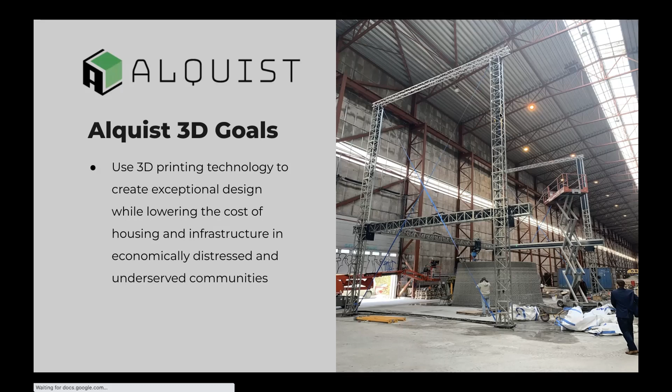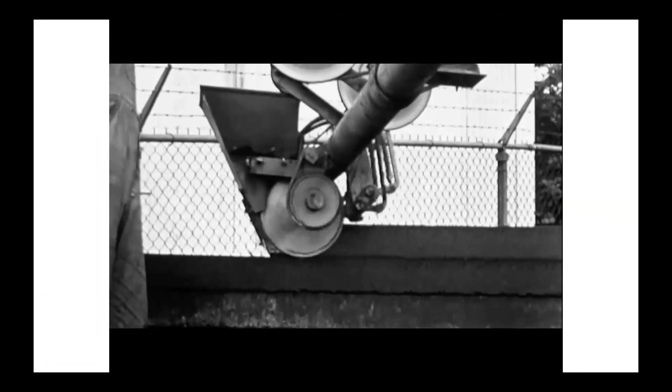Here's what's also interesting behind all of this: 3D printed homes are not necessarily new. This is a video from 1941. This is basically how we do our 3D printing with concrete right now, except that we don't stand on a hopper and direct our scaffold and dump the material directly into the hopper. We have a much more efficient system of doing that. But this is basically how we 3D print a home today.

Here was printed - we started in Virginia. We're based in Iowa City, of course, but we started printing in Virginia because we collaborated with Virginia Tech University and the state of Virginia to print the first home. This one was with Habitat for Humanity in Williamsburg, Virginia. This became the first ever 3D printed home in the world to be owner occupied.

So this is the home. It is a 1,200 square foot, 3-bed, 2-bath, single-story slab on grade home in Williamsburg. All we did was print the exterior walls of the home. The rest of the home is constructed entirely the same as you would build any other home. We still need all the plumbers, electricians, carpenters, roofers, etc. All worked on this home with the exception of the exterior walls.

The inside of the home, the homeowner chose to put up drywall and fur out the walls over the concrete. You don't have to do that, of course, but she chose to. But walking into this home, you would never know that it was 3D printed. So here's a short video of those walls being printed.

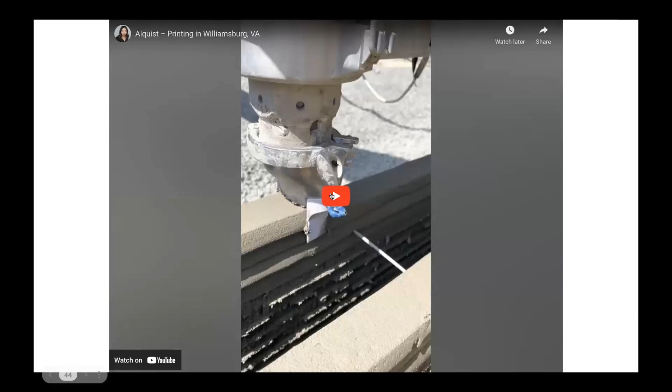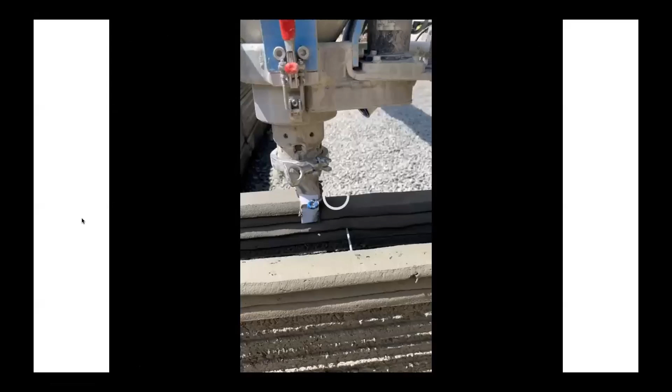Looks like the internet is taking its time here.

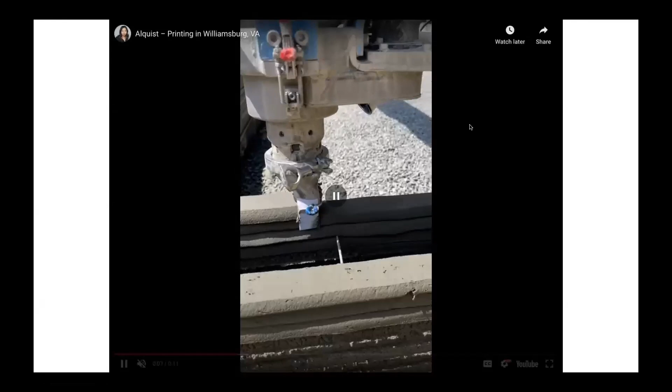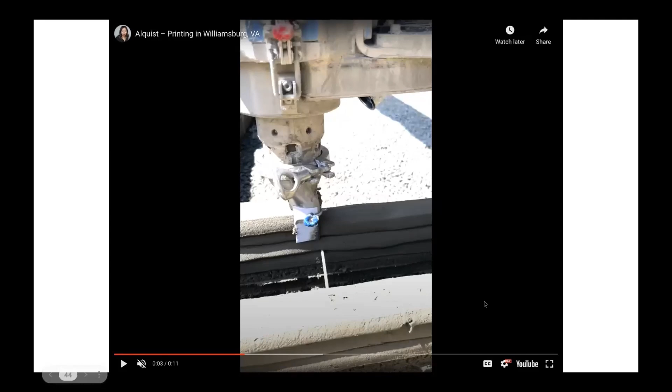This is the machine printing the two sides of the wall. The wall has 2 inches on either side with a 6-inch gap. Inside that gap between the wall systems is where we insulate and put our electrical. I'll show you some images of that in a moment. Sorry, I don't think the video played there, but I have a few others to show you.

According to Habitat, we saved 10 to 15% off what they normally would have spent had they constructed this traditionally. The home is Earthcraft certified. We put Raspberry Pi sensors in all the wall systems, reading whether there's ever any moisture buildup, shifting, or vibrations in the walls. Thankfully, in a little over 2 years now, there's been no issue whatsoever with this home.

Home number 2 was up the road in Richmond. This one was a little bit bigger, and a collaboration with lots of different groups. It's a 1,550 square foot, single story, slab on grade home, 3-bed, 2-bath, very similar design. It was important to us to design these homes so they fit in the neighborhood where they are — that was crucial. We can do futuristic, fun, crazy designs, but we wanted this technology to be adopted early on, and the best way to do that is to make a home look like a home. So that's how we landed on our designs.

This home, we did not smooth out the walls like the other home. This is the look of those walls if we didn't touch them. But I'll show you some other looks to those walls as well.

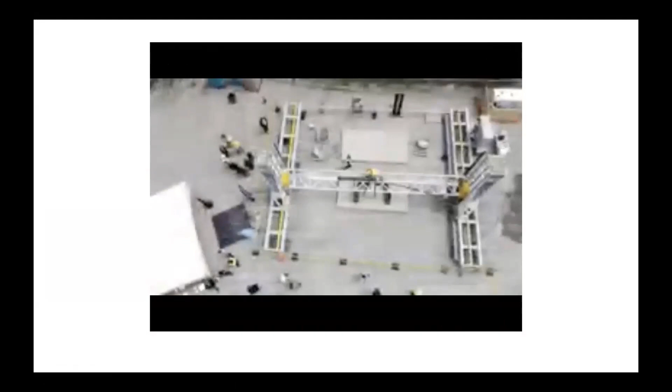For these homes, we used a different printer — a Black Buffalo large scale industrial gantry style printer. This printer is enormous, as you can see, and runs on a track system. It's a great printer, but it costs a lot to move. It takes over a week to set up and calibrate, and doesn't print as quickly as we'd like, so I'm moving away from that. I'll show you where we're going.

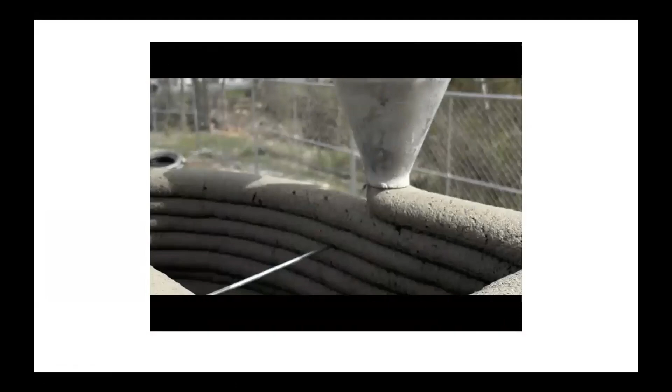That printer helped print these 2 homes here — the first time we did 2 homes side by side, in Newport News.

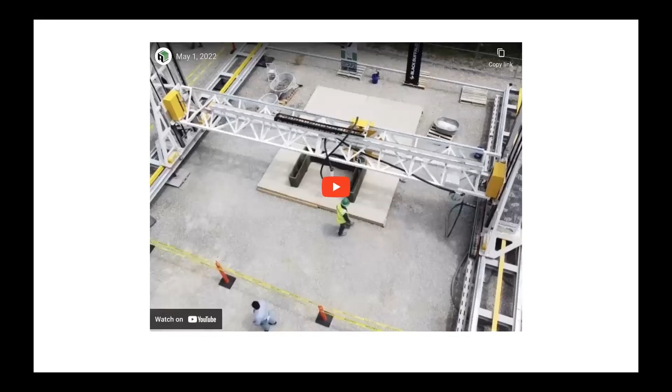See here how we do the wall system. These widths, the walls, are 3 inches wide, with a 6-inch gap. Inside the gap, what you're seeing here is at the 3-foot mark. We stop there when we get to the base of the window systems.

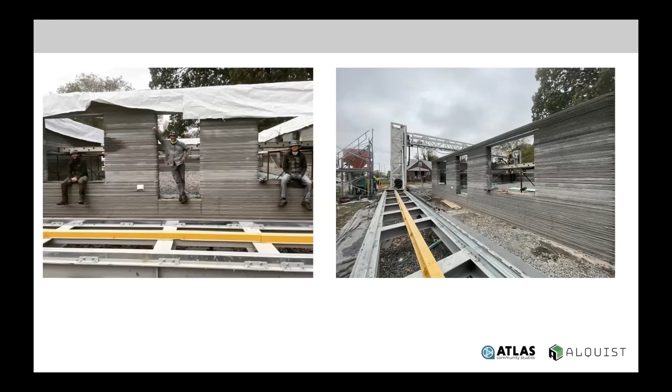That's when the electricians come in and lay the conduit like you see here. We also put reinforced steel ladder systems every 12 inches, and can use rebar if needed. We also put in all-thread that goes directly into the footing and connects into the top of the bond beam at the top of the wall system, so we've got great structural integrity.

Then we grout out these mini columns below the window systems for extra structural stability. After the electricians put their conduit in, we cut out the junction boxes and sockets into the concrete in real time while it's still wet. The electricians finish their job, and then we come back and keep printing straight on up.

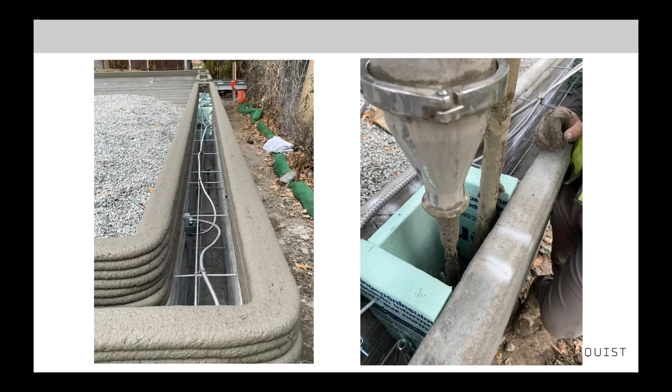Here's a look at the 2 homes when they were finished side by side in Newport News. You can see the plumbing gets put into the center, and then we lay the slab.

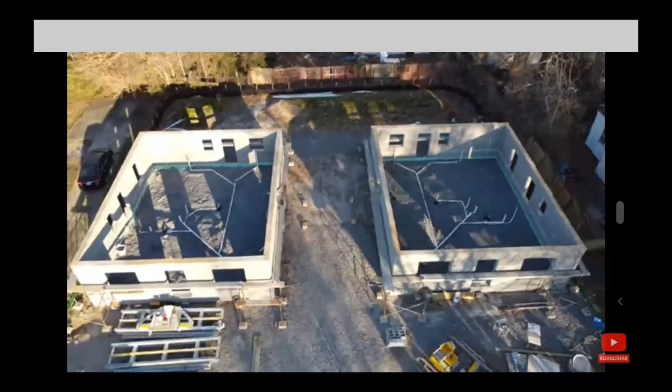Here are the advantages of 3D printing as we know it today. The first three are your capital savings. First, time — we can reduce the overall time to frame out a home by 2 to 4 weeks. Once we get moving, this is a scale game. After we print 1 or 2 homes on a job site and move on to printing 5 to 10 more, we can go incredibly fast. That is the goal.

So we're moving quickly there. We need less labor on site, only about 2 to 3 humans to run the printer. The material cost is typically less expensive than traditional lumber, and we need to constantly lower that cost. I'll talk about how we're doing that in a moment.

But you add all that up, today, if we're just printing 1 house, the costs are pretty comparable to a regular stick-built home. When we're printing 10 or more homes, we can get to a 5 to 10% savings. When we're printing 25 or more, we're seeing 20% savings or more already right now, and we keep getting better. I'll show you that.

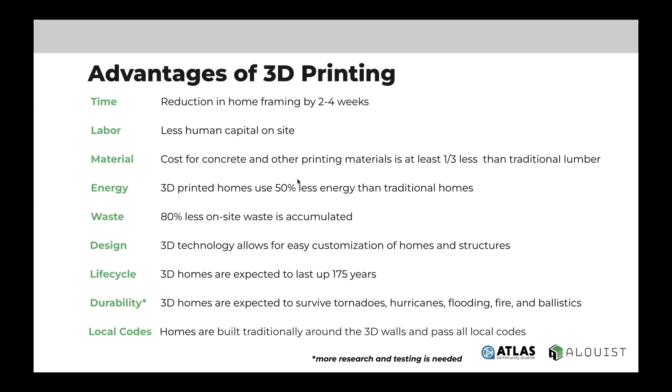The energy, these homes are thermally broken, so we use 50% less energy in a 3D concrete printed home than a stick-built home. Another major savings right there because the walls are thermally broken. 80% less waste on site. The wall systems are going to last forever. These are concrete, and we can stand up to 175-mile-per-hour winds, as well as most major storms. These homes don't burn. There's a lot of positives to how we can build out these homes.

The plan right now for Iowa, we're in Muscatine right now. Tomorrow is day one of the first home. We're printing 10 homes here in Muscatine. Then we're going to be printing on the western side of the state in Lenox and Malvern. And then, of course, we're coming to Iowa City later this fall, where we're going to attempt the first ever two-story sixplex we've done, which we're working on in Iowa City.

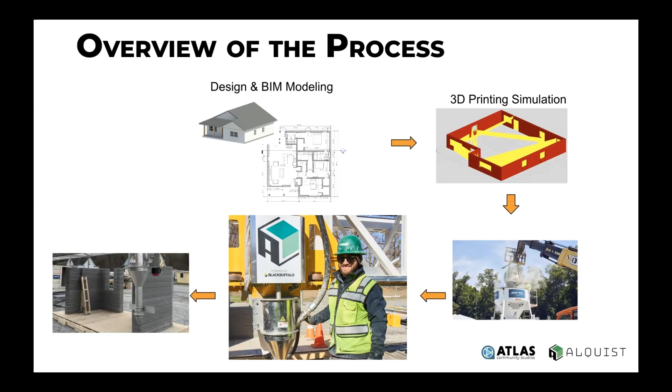Here's how it works. You design the home like you would any other home. That CAD file gets turned into a G-code file, which is what talks to the printer. We mix our material on site, that gets pumped through a hose to the print nozzle, and we lay out the home layer by layer. We got lots of press for this from all over the world, which is exciting, of course, but that's not why we do this — though it was exciting.

Experience is a big problem. Hiring is a big problem. There's no program training people, so to that end, we've created one. I'll talk about that in a moment.

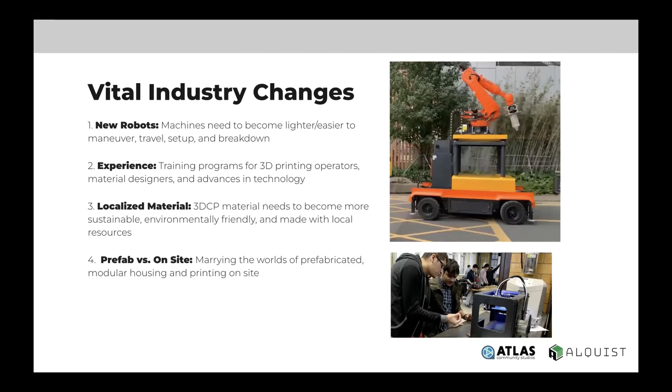Making the material locally is the number one thing we could do to drop our cost. So we're already doing that here in Muscatine, where we're using local sand and gravel and cement from Davenport, and then bringing in our additives. The next step for us, and we'll hopefully have this figured out by the time the Iowa City project rolls around, is to source our additives locally, so we can really get these costs down super low.

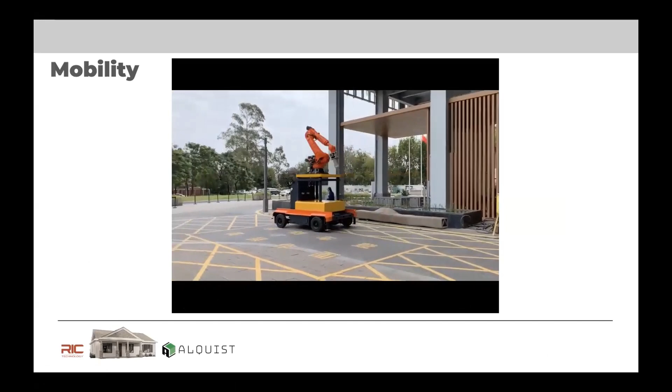From a mobility standpoint, this is the printer we're using here in Muscatine, and we'll bring it to Johnson County. As you can see, it's incredibly mobile and remote controlled. It runs on a chassis system, but then we add rails to either side to print the home. This printer can be pulled by a pickup truck on a flatbed. The other big gantry printers you saw earlier require 2 tractor trailers to move them around. It's not efficient yet — this is the better way to go.

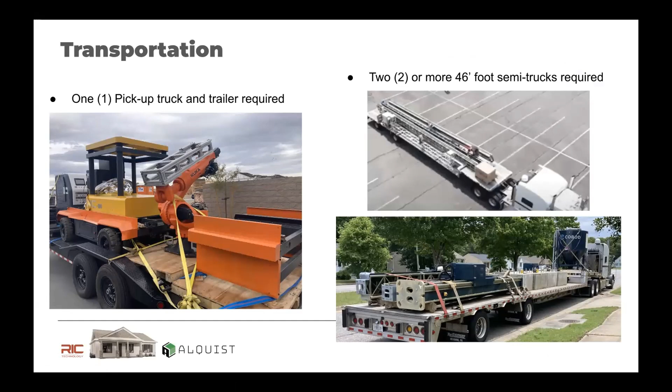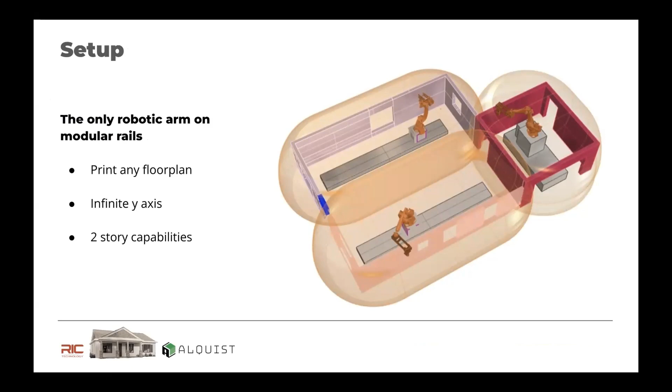The way we're going to print these homes here in Muscatine, as you can see, is we're in the track system, and that's how we print. The first part is the north wall here in purple, then we move the printer down here, we print this side of the wall, and then we put the printer in the back to print the garage. Much more efficient system — we can control the aesthetics even better. And we love this robot arm versus the gantry printer we were using.

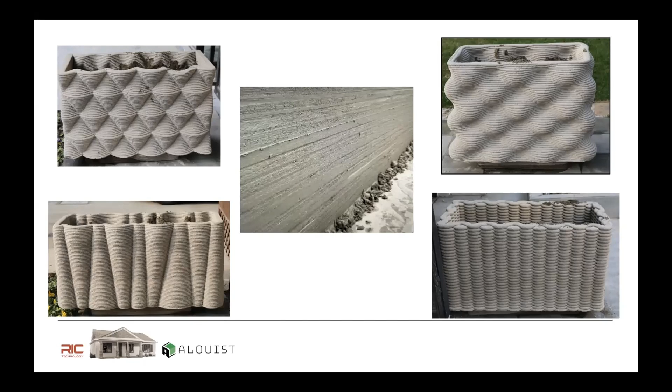We're also working on new materials. Concrete's great, but it's far from the most environmentally friendly. We know that, so we're working on making a hempcrete, as well as using geopolymers, recycled glass, recycled plastic. It's a brave new world in material design. By this time next year, there's going to be several other products available on the market that are much more environmentally friendly. Our goal is to get to carbon negative.

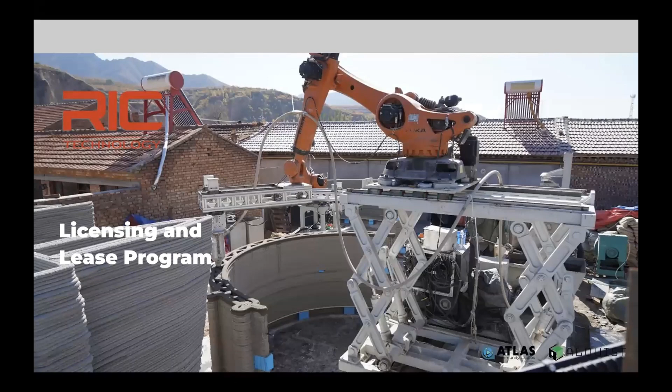RIC Technology is the maker of our printer. We are first in line for any time we want a printer—it only takes 90 days to get it. This is the robot arm. They've been printing in China for 6 years, and they're now having a Los Angeles-based operation. We are one of the first groups in America to use their printer here, and it's super exciting.

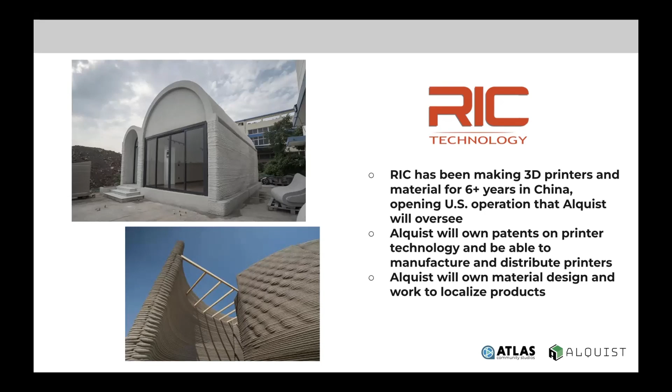We also developed the lease and license program. For people that want to get into this, they can lease the printer for anywhere from 3 months to 36 months, and it comes with our team coming and training them. They can buy it, of course, or you can lease it for a period of time, and if you choose to buy it, they knock off the price for what you've already paid in the lease. No one else is doing this. This allows people to really test out whether 3D is going to be for them.

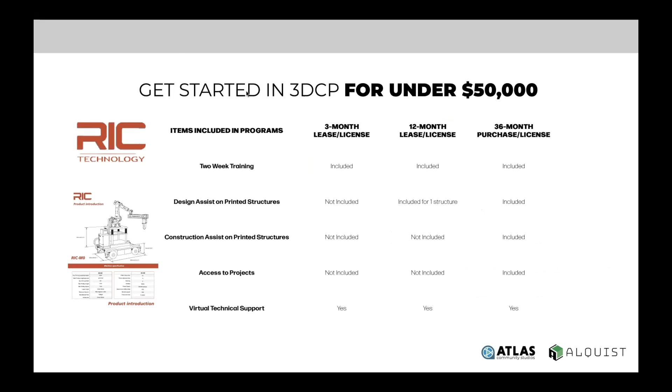We are partnering with Mavericks Renewables. They put solar panels on the home roofs and EV chargers in the garages. And then Duracell is our partner on the battery front. For an added cost, you can put a battery directly into your home and become net zero right out of the gate. So here's where we see things going in the future.

First of all, I want to mention why we're called Alquist. My background is in theater, so of course it makes total sense that I run a construction company. Alquist is the name of a character from a 1920 Czechoslovakian play that no one's ever heard of called RUR. This is the piece of literature that coined the term robot. This is where robot comes from.

So the plot of the show is man invents robots to speed up his manufacturing facility. The robots don't like how they're being treated. They rise up and they kill all the humans. Spoiler alert. But they leave one human alive, and that's Alquist, the main engineer, the only person in the play who believes that robots and humans can coexist together peacefully. He's spared by the robots and charged with rebooting the human race.

We're called Alquist as a reminder that we are using automation to replace some human jobs of framers. Now, we know that's happening, but we can create far more jobs, which is why we believe heavily in a workforce development program. To that end, we have created an 8-week certificate course that's going to be debuting this fall at Muscatine Community College. This will be the first training program for 3D concrete printing in the country, and it's going to happen right here in Iowa, and we're going to be able to pull our talent directly from that. We believe this is a gateway to create hundreds of jobs and get young people back into the trades.

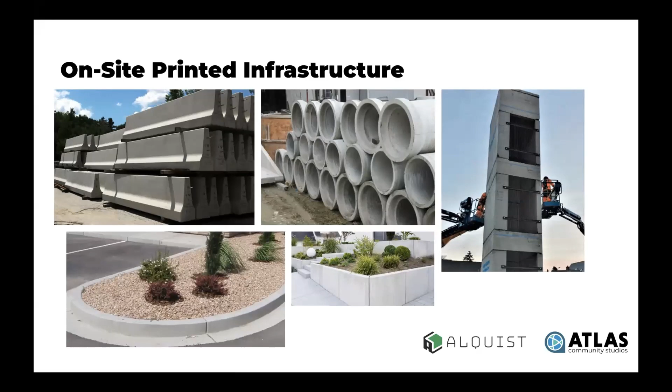We're not just printing houses. We can print anything made out of concrete: underground culverts, parking structures, landscape architecture, elevator shafts, retaining walls, anything made out of concrete. My wife gets tired of us driving around with me pointing and saying, we can print that, we can print that. We're doing all of those things right now. We've got designs across the board. We also believe in a new approach to home repair.

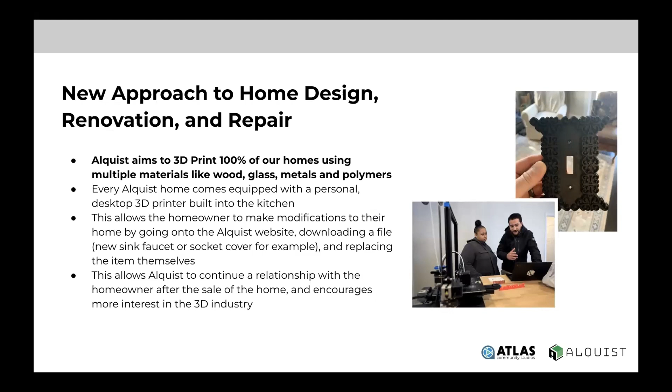Every Alquist home comes with your own personal 3D printer built into your kitchen, just like a microwave. We're doing that to help stand up the industry, but also to give the homeowner a jump drive of designs. In the future, you're not going to go to the hardware store if you want to make a repair or change the look of something. You're going to go online, download a file, and print it out yourself.

What you're about to see being printed here is a light switch cover. It took us about 40 minutes to print it, and it cost about 17 cents. And oh, there we go.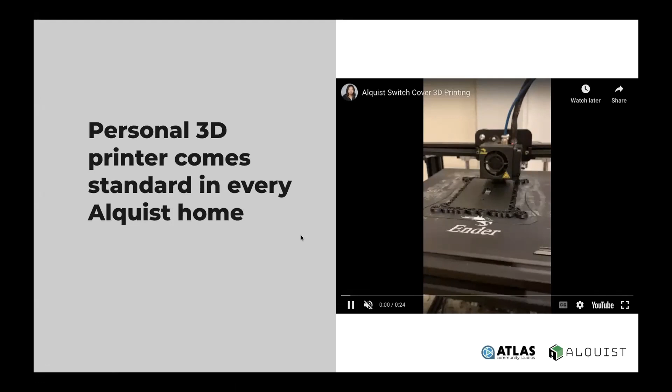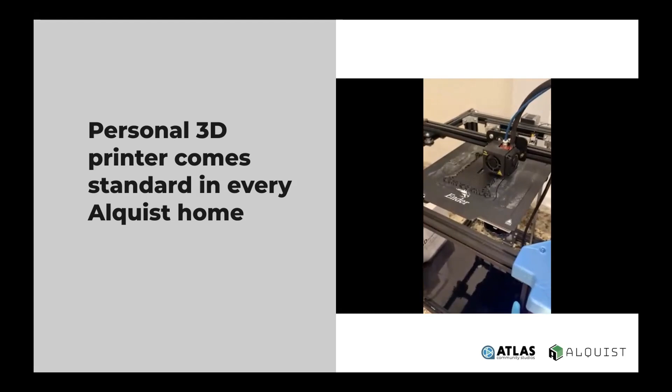So we are printing all switch covers, doorknobs, drawer pulls, and sink faucets in the homes right now. We're going to be graduating to printing kitchen cabinets and kitchen islands and so many other pieces of the home. All of it can be printed in glass and metal. We're even printing in chocolate. It's a brave new world for printing as well.

So what's next for us is a lot more R&D with academic institutions. We're working closely with Iowa State as well as Muscatine Community College. We're creating a locally sourced material, and we're getting the workforce development program up and running. Of course, we have our projects throughout Iowa and several others in Missouri that we're working on now. But we really want to be printing in Johnson County, above and beyond the Iowa City project. We're excited about the future of where this is headed.

I'd like to close with a quote from one of my mentors, Richard Florida. He says, 'The remote work revolution promises to change the way Americans work and live. It will allow smaller cities, suburbs, and rural areas to compete with the superstar cities on the basis of price and amenities. It will shift the main thrust of economic development from paying incentives to big employers to investing in building up a community's quality of life. As communities attract more remote workers, their tax bases will grow, allowing them to improve schools and public services, benefiting everyone. Eventually, companies will come too. That holds out the possibility of a better, virtuous circle of economic development.'